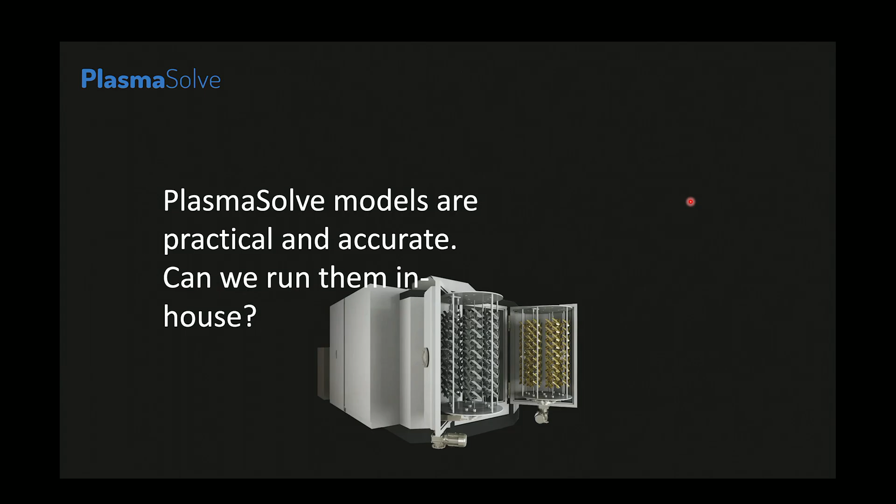But they also ask the question whether it is possible to have these solutions in-house for further prototyping, because we are sensitive to the fact that sometimes you simply cannot send equipment or process details to a contractor, be it for convenience reasons, contractual reasons, or legal reasons. And so today, I called this meeting together, and I'm so happy that so many of you were able to join, because from this day onward, the answer to this question from our end is a clear and decisive yes.

We have been running simulations internally. We have been doing modeling internally for the past 8 years. And in those 8 years, we have been continuously improving our software. We made various iterations on it. And over those 8 years, we were never happy enough with it to make a standalone product out of it.

But this year is the year where we say, okay, the PlasmaSolve software is mature enough, documented enough, and stable enough so that it can be released as a standalone product to the whole world, to all the plasma engineers and plasma coating engineers out there.

The name of the software is MatSight. That is the brand name we adopted. And we like to think of that as the next evolutionary leap in Industry 4.0, and more specifically in plasma process simulation and plasma equipment simulation.

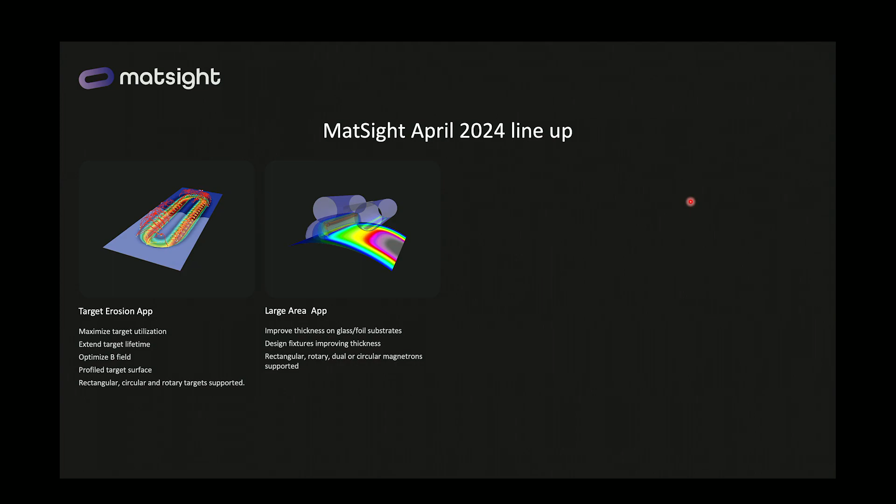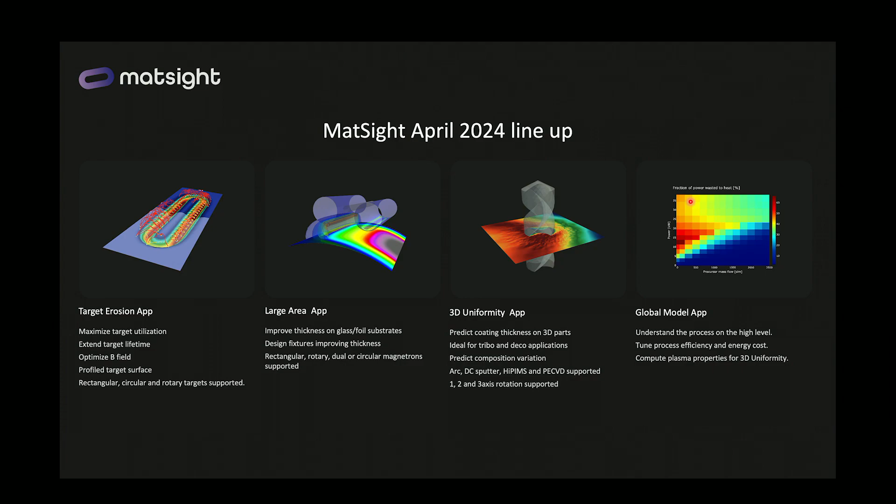We have the large area app, which is specifically tailored to the needs of operators and developers of inline coaters and roll-to-roll coaters. We have the 3D uniformity app that allows you to simulate coatings on real 3-dimensional substrates, most probably for tribological or decorative applications. And we have the global model app, which is sort of a multi-parameter, multi-domain simulation tool. This is what we are releasing today, and this is what is becoming available today.

But the list is by far not final. We picked these 4 apps because we've been doing consultancy for several years. And based on our experience with these 4 apps, either individually or in combination, we are able to address and to solve over 80% of all the consultancy projects we engage in. That is why we decided to release these 4 applications precisely.

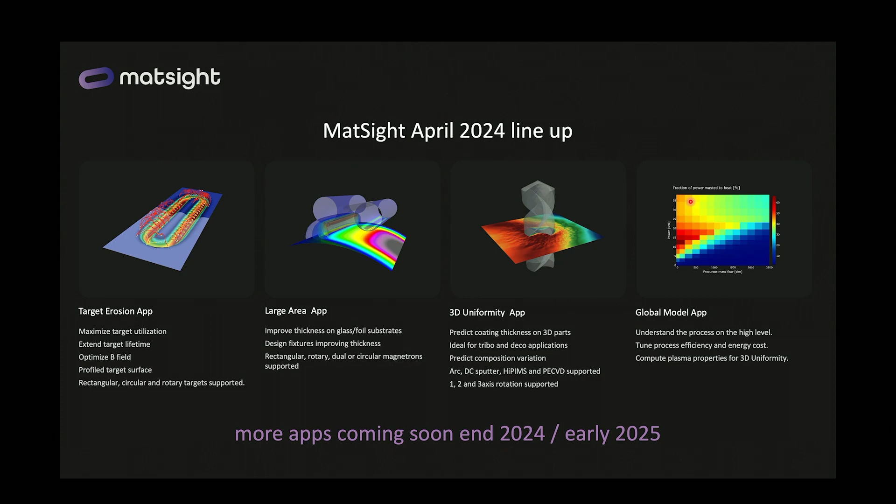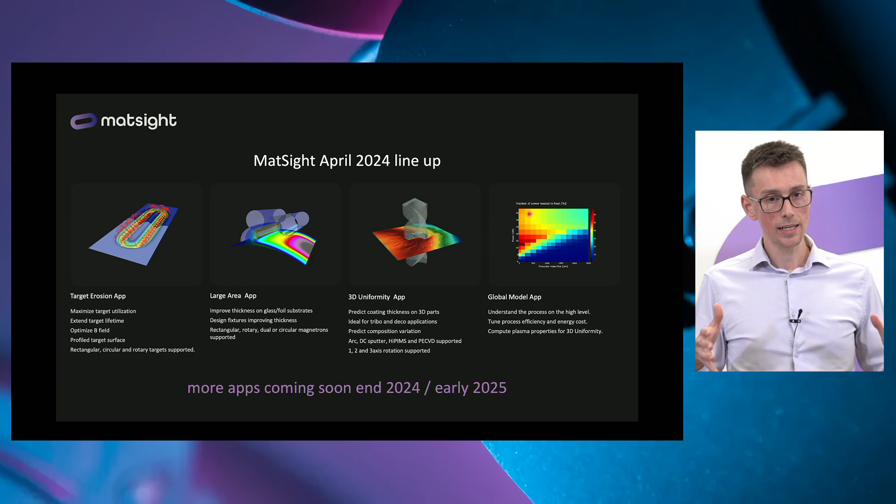The other modules that are coming later this year or maybe at the beginning of next year may not even be simulations. So for example, we even have a big data processing module in the works that allows you to analyze your machine logs at a glance. And we will be, of course, releasing them to you as we go. So I will get into more detail about these applications in a minute. But before I do, let me just dedicate 2 slides to the philosophy of the software.

I boldly claimed that we see MatSight as the next evolutionary leap in plasma process and plasma equipment simulation. So I think I should specify that a little further, because there have been legacy solutions for plasma simulation and plasma coating simulation. And I just want to mention where we differentiate as opposed to where we are consistent. I think the main point where we are consistent with all the simulation and modeling know-how of the past decade or 2 is the physics. We are not reporting here or publishing here any revolutionary approach to treating physics.

We are very much aware of the amazing work that the giants of our industry did on the topic of coating process modeling and coating process simulation. And we try to stand on the shoulders of those giants and look at the different physical mechanisms and chemical mechanisms that they studied, identify those mechanisms which are the most important for a given challenge, for a given application, and distill the best out of this work and make sure that it gets into the MatSight software.

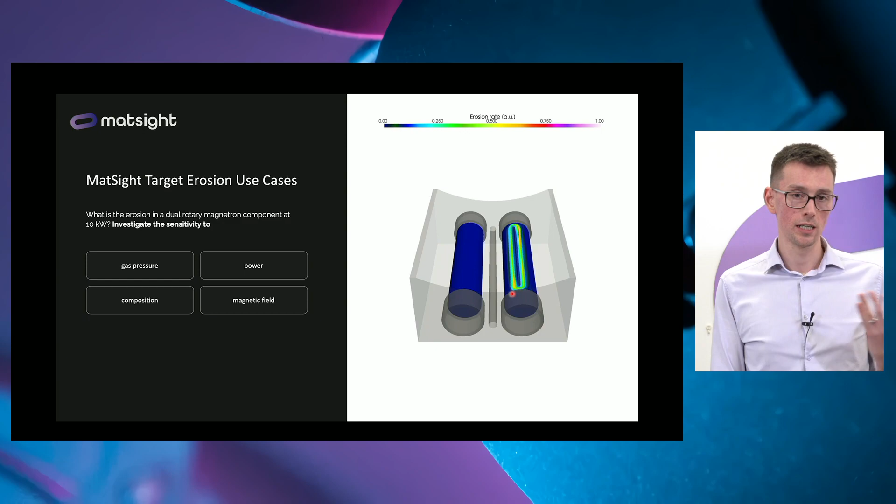The typical output that you get from the target erosion application, the primary output that you get, is of course the number, the target utilization, but what goes hand in hand with it is the spatially resolved erosion rate. Here we see a time snapshot of the erosion rate in an MF dual sputtering system. So as you're probably guessing, the cathode on the right is the cathode, whereas the other electrode is in this snapshot the anode. And we can look at it from various angles, and you see that there are clear over-erosion patterns in the corners of the racetrack.

You can also sweep through the simulation, visualizing the plasma density and identifying potential hotspots and electron hotspots on the anode or on the opposing cathode, which I dare say is pretty interesting. But what is even more interesting and even more practical is doing parametric studies with it, right? Because describing the current system, that's great, but the question driving us is always, how do I improve it?

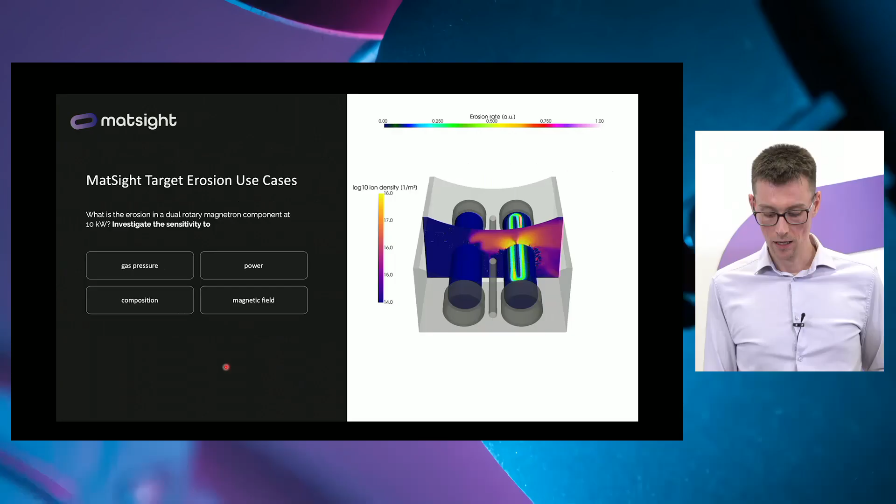You can test with the erosion app the sensitivity of the erosion to the gas pressure, power, target composition or gas composition, or the magnetic field. On purpose, I will show you the pressure first. I will sweep through 0.3, 0.45, and 0.6 pascals, and when I initially do that, you'll probably see nothing. If I zoom in on that, and if you look really close, you will see that there is a very subtle difference in how the erosion rate in this over-erosion spot changed.

Visually, this might not seem as much, but if you had MatSight here and if you clicked into the over-erosion spot, you would actually see that there is a tiny change of 4% in the over-erosion groove, which may seem insignificant, but actually the 4% change in the depth of the over-erosion pattern translates to a 4% reduction of the lifetime of the rotary target. So this may actually not be as little change as it seems.

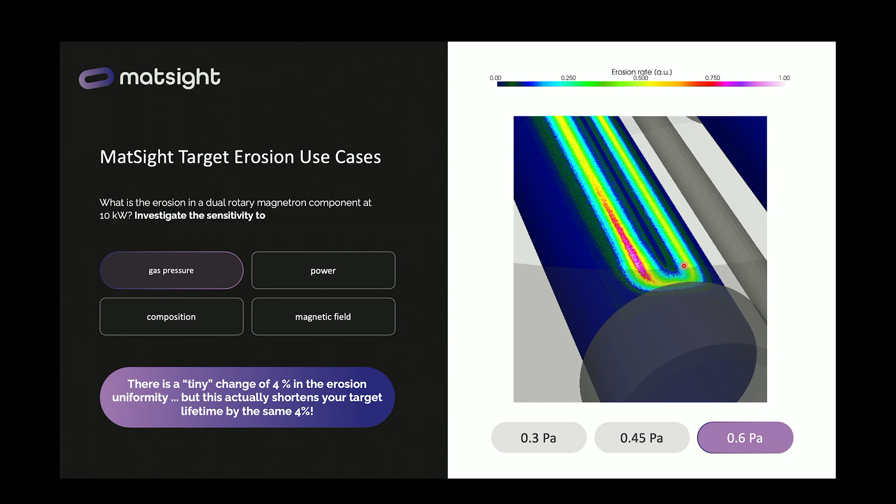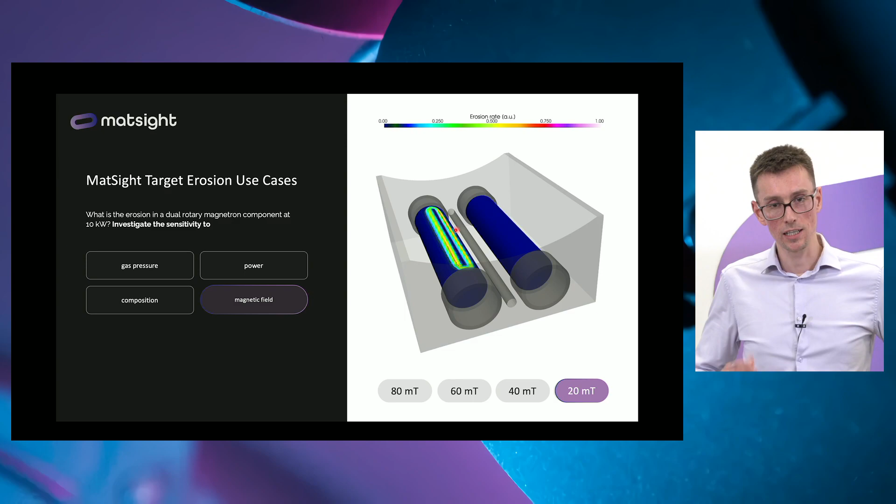There is still an over-erosion on this side, but it is almost perfectly compensated by the over-erosion in the other wing of the racetrack. So in this case, you can assume quite a uniform, quite an optimized erosion of the rotary target. But of course, you might say, well, this would suggest that if you go to zero magnetic field, then you have a perfect erosion. This is, of course, not true. So let's see how that behaves in more detail.

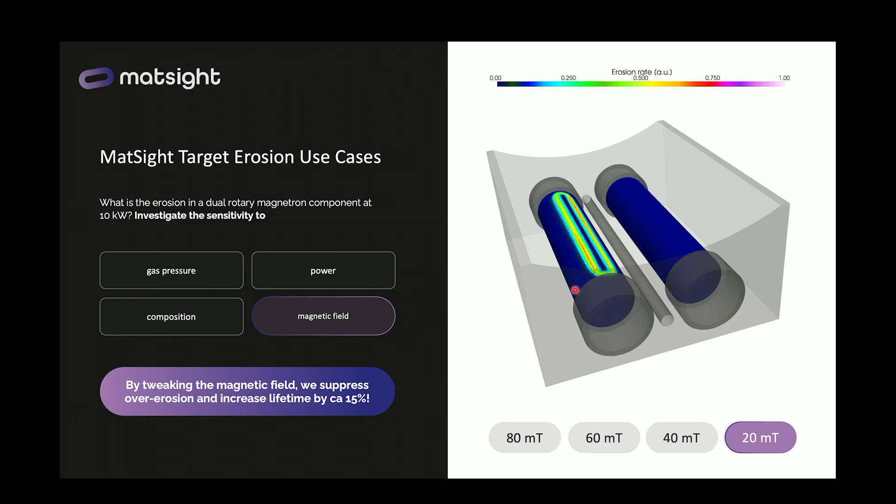Oh, and before we do, I should also mention that just by doing this simple trick of reducing the magnetic field, we were able to suppress the over-erosion and increase the target lifetime by approximately 15%.

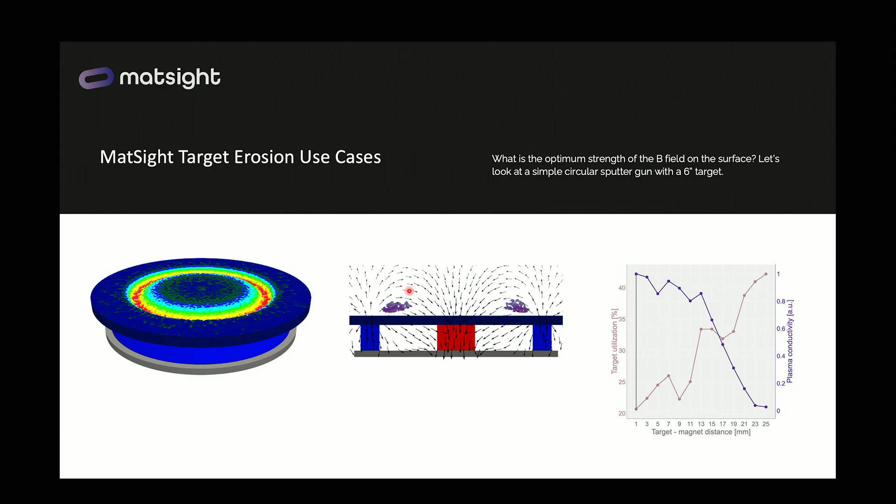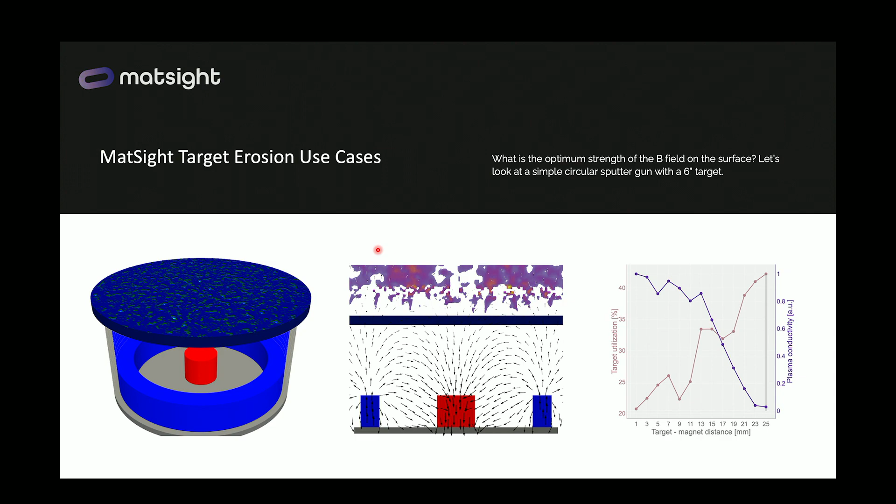So if I cycle through that again, you can very easily visualize how the plasma and erosion respond to the strength of the magnetic field and make the decision what is the ideal distance of the target surface and the magnetic assembly. In this specific case, we went from 20% target utilization to 35%. So by finding the right magnet position, the target utilization in this specific scenario nearly doubled.

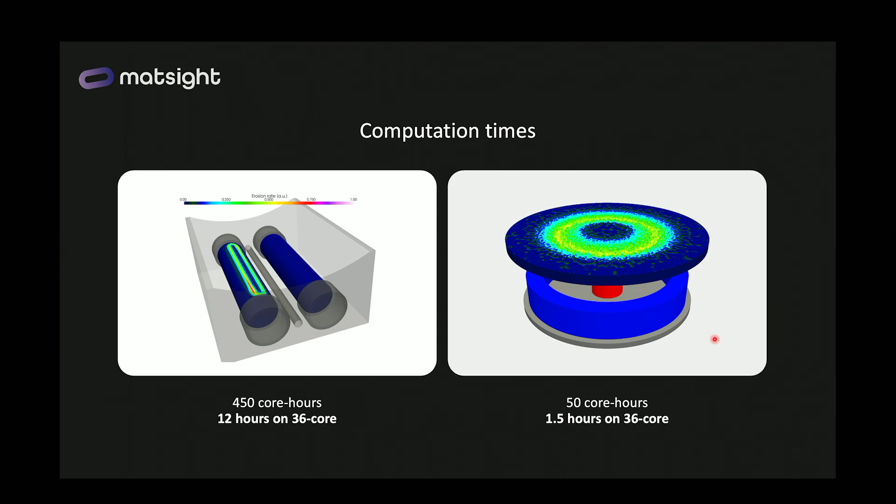And before we move on to the next step, I want to comment on the computation times. The large 1 meter or half a meter industrial setup takes 12 hours to compute on a 36-core machine. If you want to extrapolate to 4-meter cathodes, you can essentially apply a linear extrapolation. So in this case, the whole geometry was about 1 meter long. So for a 4-meter cathode, you could expect something like 48 to 60 hours.

This is certainly faster than building the cathode prototype. It's probably even faster than doing experiments with existing cathode prototypes and comparing them. On the smaller setup with a 6-inch planar target, you can get the result in as little as 1.5 hours. So this is a very fast computation time, I would say.

Okay, so this was about the target erosion app, but of course eroding the target and designing a proper cathode is important, but ultimately the product we are after is the coating. And we want to understand how the coating affects what grows on the substrate. For those of you who are doing that in inline coaters, roll-to-roll coaters, generally in large area applications, we have devised the MatSight Large Area app.

And the MatSight Large Area app does effectively simulate how a given racetrack, how a given cathode imprint propagates onto the substrate and how it affects the film thickness, the film composition, and indirectly the film properties. You can use it to design fixtures that improve your coating thickness distribution. You can also use it in drum coaters or batch coaters to reduce the top, middle, bottom thickness variation.

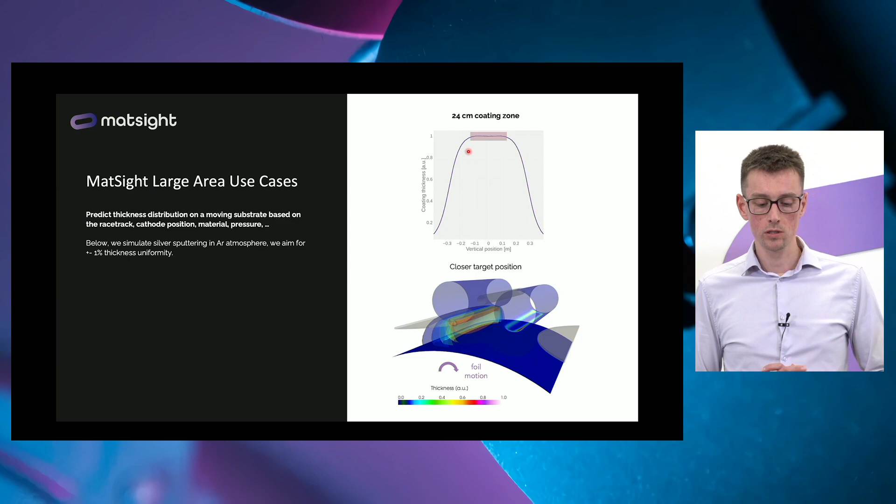So the next logical step is moving the fixture a bit further away from the cathodes, and this actually turns out to be the sweet spot for us here, because with this specific fixture position that has to be within plus minus 2 centimeters, let's say, the width of the coating zone has increased from the original 16 centimeters to about 24 centimeters, which is a significant increase.

Now imagine testing this experimentally, right? If you wanted to compare different fixture geometries, how many days it would take, how many weeks it would take to do that. If you have the simulation app that will guide you through the process, it will be much less painful, much less demanding to incorporate, for example, a cathode with a new metal, because this deposition imprint is going to be metal-specific and gas-specific. So I think the time savings on this specifically are tremendous.

You can also get a similar effect by moving the cathodes closer to the substrate. You see that in this case, the width of the coating zone is even larger. It is 30 centimeters, and if we were a bit more permissive about the thickness variation, it would probably be even more. But of course, whether it is a good idea to move the cathodes closer to the substrate or not, that depends on the coating that you're trying to grow.

And to understand whether this is going to impact your coating properties or your coating quality, you can always combine the large area deposition app with the target erosion app or with the global plasma model and see whether the ion bombardment and other plasma properties which are affecting the coating are changing in any significant way.

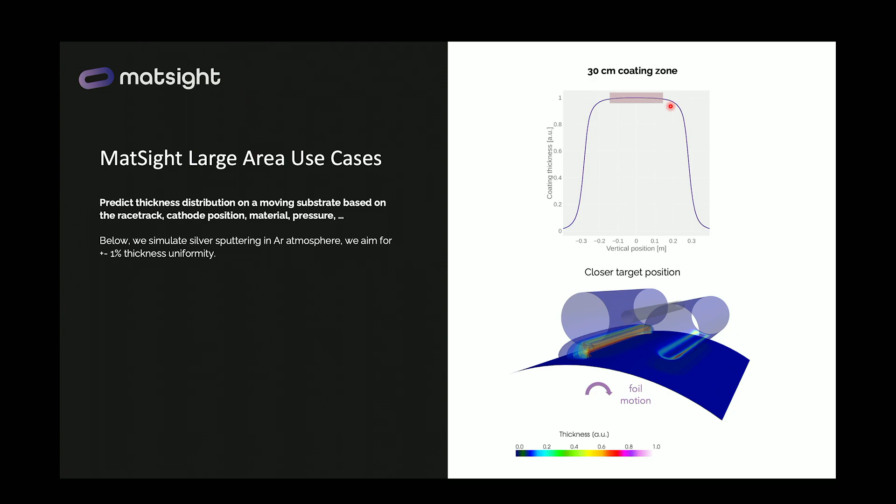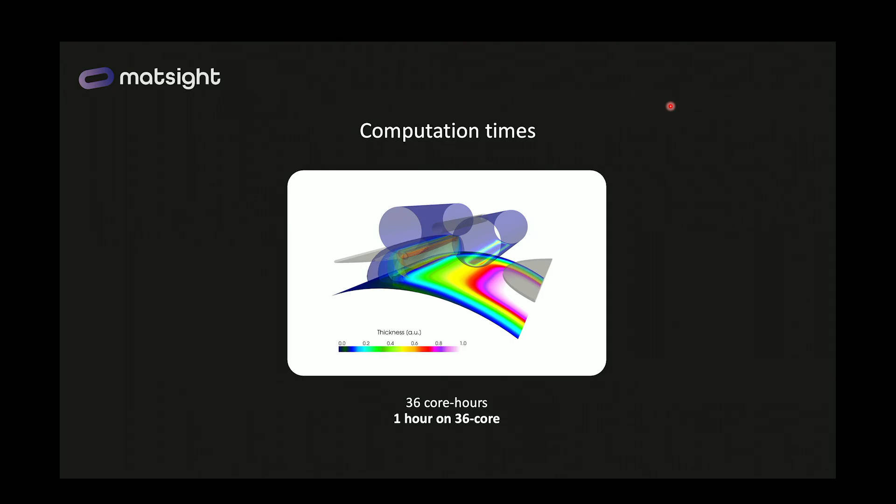The computation times on this app are, I would say, better than fast enough. So for this large area coater, it took 1 hour to perform this simulation. So if you went to a 4-meter coater, again, a linear scaling would apply, and you would get your result in about 4 hours.

But what if your substrate is not planar? What if it is more elaborate, like a drill bit, a milling tool, or whatever else you might be coating? For those of you, we devised the MatSight 3D Uniformity app, which allows you to visualize variations of thickness, variations of coating atomic composition, and to an extent a variation of coating properties on realistic three-dimensional parts.

If you're running batch coaters, if you're a coating center or a job coater, this can save you dozens to hundreds of trial processes per year. Our calculation and our customers' calculation is that if the app saves you 20 to 25 trial and error processes, it will have already paid for itself.

The application is a hybrid algorithm based on tracing neutral particles and charged particles. And thanks to that, it is supporting DC sputtering, MF sputtering, HiPIMS, arc PVD alike, and you can even use it for PECVD and ion etching.

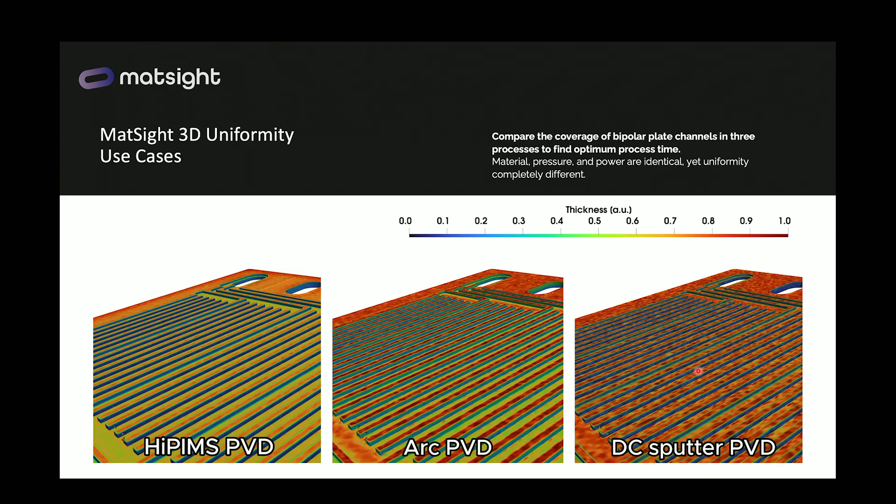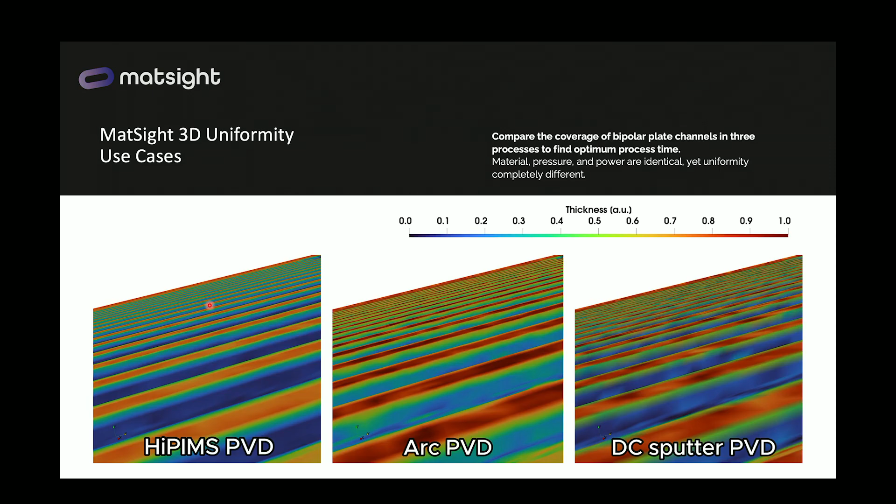So if we take a closer look, you'll see that the bipolar plate coated by sputtering PVD is actually suffering from highly undercoated walls of the channels, which are coated in a much better way in arc PVD, and HiPIMS is somewhere between DC sputtering and arc PVD, as you would expect.

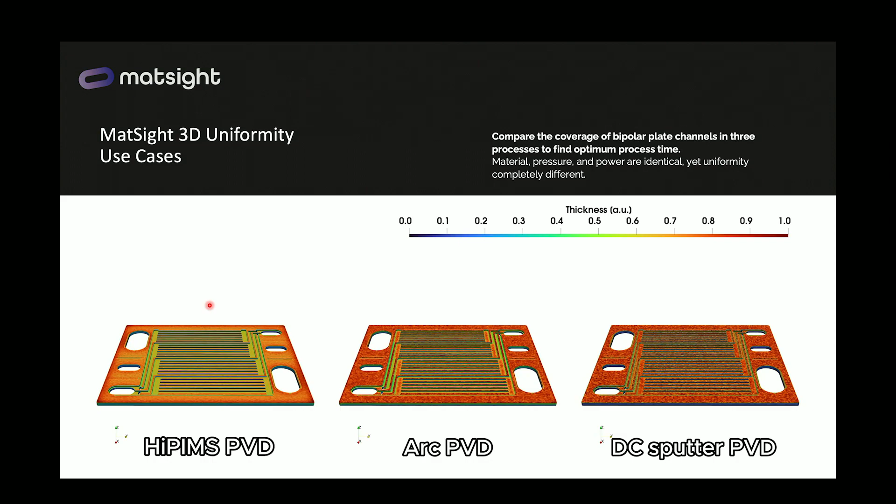And of course, here we're comparing three extreme cases: DC sputtering, arc PVD, and HiPIMS. You could also use the app to visualize what would happen if you change the bias voltage in either of these processes, if you change the gas pressure, if you change the power of your cathode, and how that impacts the coating distribution on your component.

You could also see how different elements are deposited, because lighter elements are going to have an easier way of penetrating these narrow trenches and narrow channels.

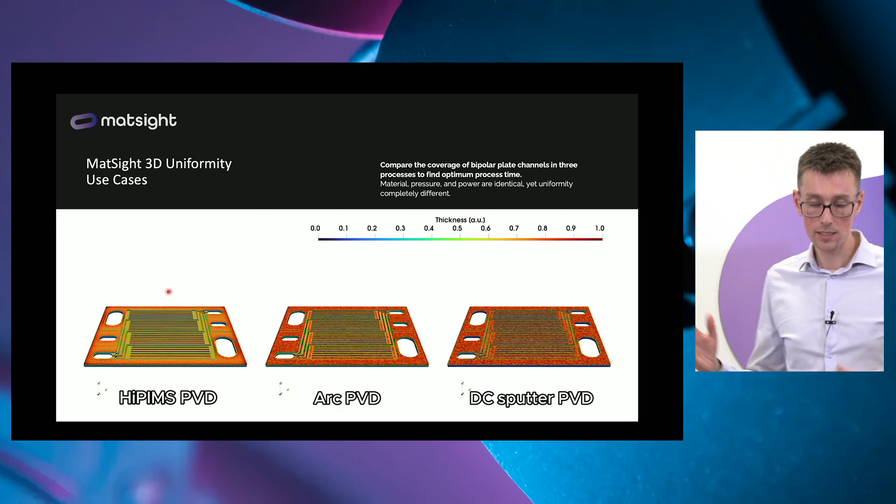But many of you are coating 3D assemblies and loading them like these bevel gears, right? And if I showed you a static simulation, just like in the previous case with the bipolar plate, then for a realistically loaded coater, this is probably what you'd get: coating coming from one side where the cathodes are, and the other part uncoated.

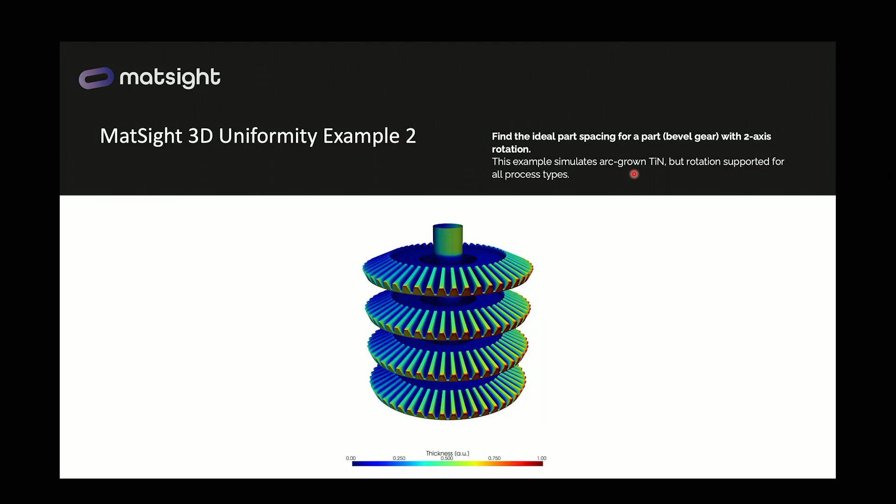So the question is, does MatSight support the rotation of these parts? And I'm saying that because, of course, it can. The flexibility of the software allows you to revolve the part in the simulation and integrate so that you obtain a full 360-degree deposition in these bevel gears undergoing two-axis rotation.

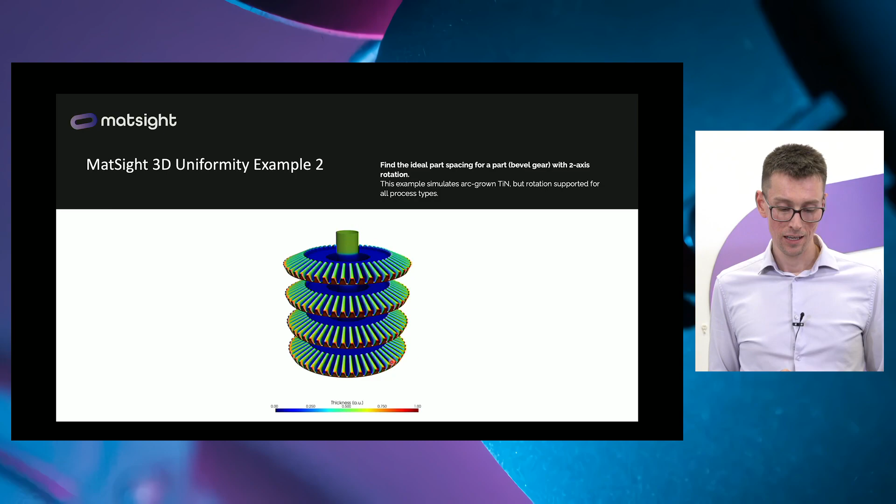And that opens up possibilities for a range of interesting studies. In this one, in all cases, it is arc PVD. We varied the distance between the bevel gears, and you can clearly see that there is such a thing as an ideal distance between your components.

If the bevel gears are too close to each other, you get over-deposition on the outer tooth of the gear and under-deposition on the inner side. Same for the second-lowest distance. At this distance, which was about 35 millimeters, you already get quite a nice and even deposition on the teeth, which gets even better if you increase the distance further.

And then, depending on your thickness goal, you can use MatSight and the 3D Uniformity app to design the optimum loading of your coater and of the components that you're coating.

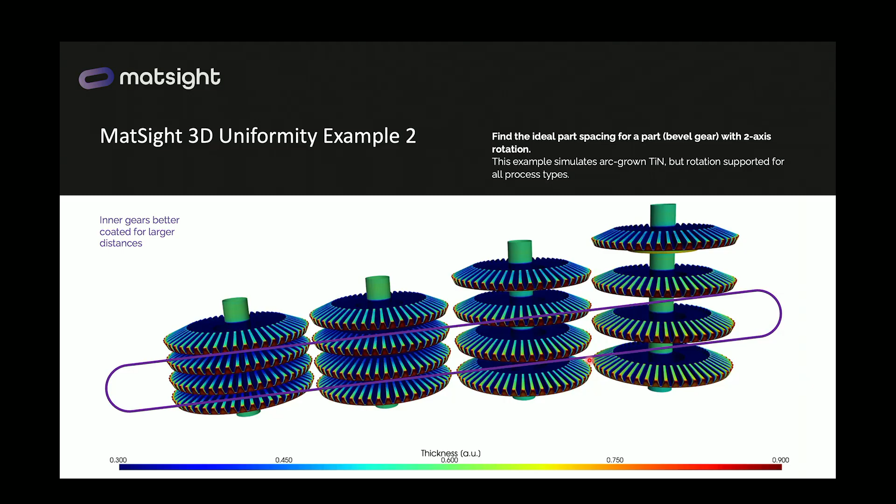But I looked at the list of people who registered, and there were at least 20 people doing tribological and decorative coatings. In those coaters, you're usually running 3-axis rotation. And I bet you're wondering whether MatSight can do that as well. Well, I'm happy to say that it can.

And if you are coating from multiple elements, which most of you are going to be doing, you can also visualize how different elements get deposited on different parts of your 3D tool that you are coating.

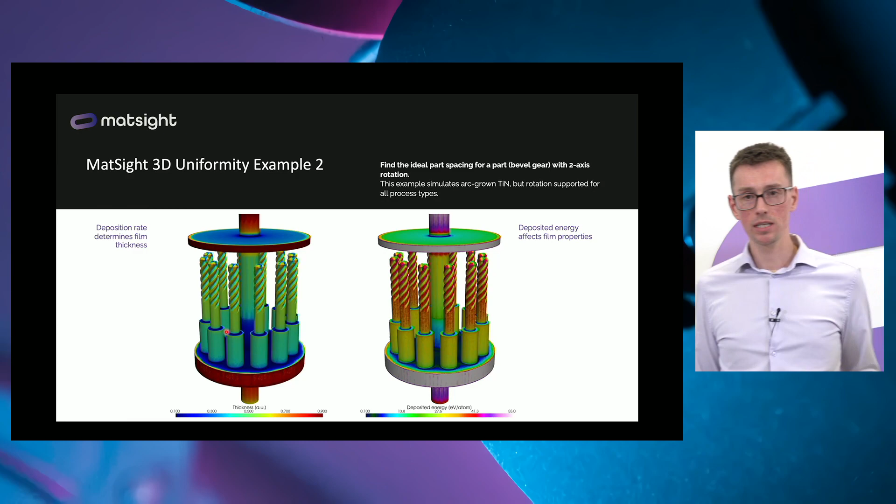So this is indeed a very flexible tool, and with acceptable computational costs, it really allows you to simulate fully loaded substrate holders and carousels and find optimum distance between parts and fixtures, and really avoid a huge volume of trial and error that you often need to do when you need to transfer your process to a new part geometry or to a new part size.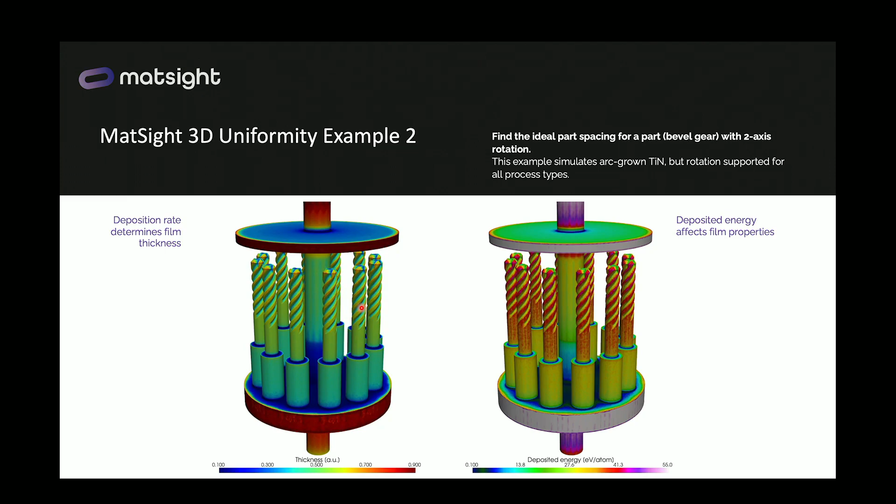The computation times on the Uniformity app are, I dare say, acceptable. It is in the order of hours on a 36-core machine. For the fully loaded rotating carousel box, it is about 10 hours, including all the rotations.

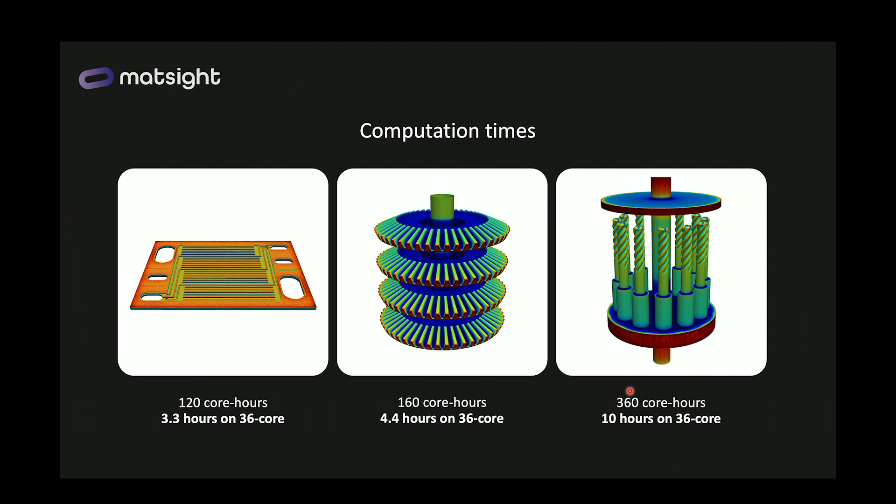Now, I have to admit one thing: we don't run those simulations that take 10 hours. I mean, we do sometimes, but it is not always the most logical thing to do. For example, if you want to optimize just the top fixture position, you don't need all the detail in your simulation to find the right position of the top plate.

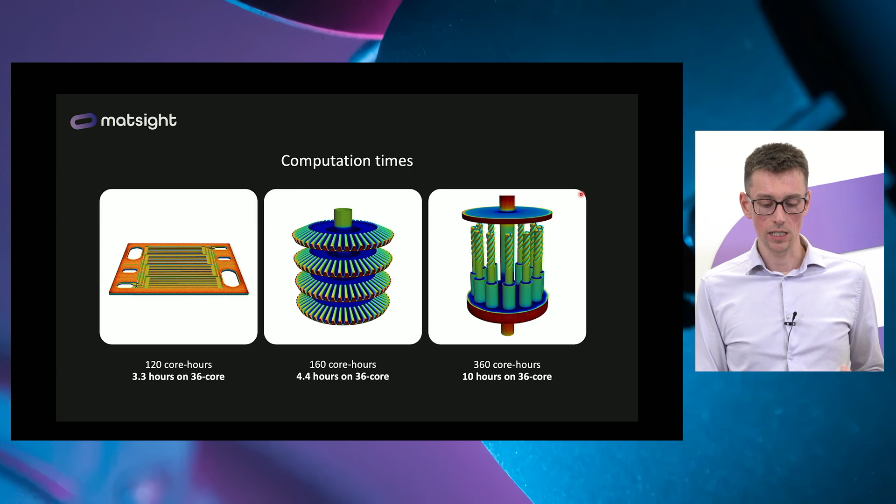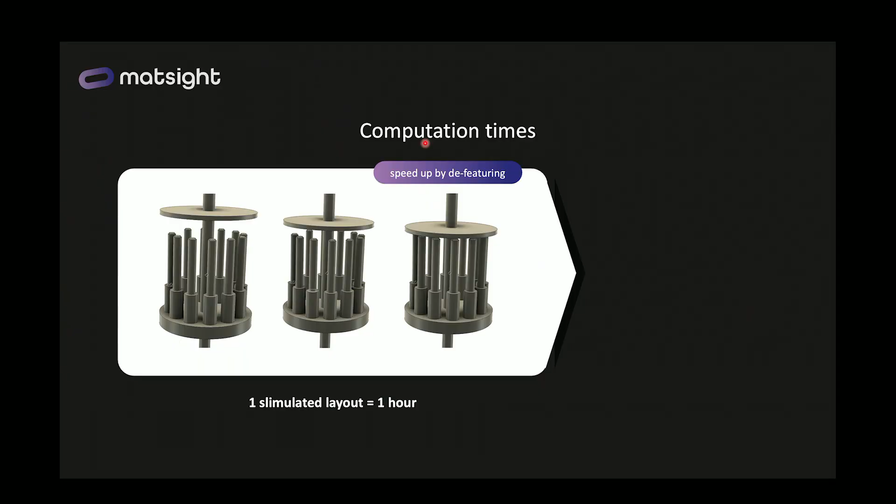So if we get the task of finding the right plate position for a specific process point and for a specific part geometry, we very often defeature the geometry, smooth out the grooves and cutting edges of the milling tools, and run these simplified simulations where we just find the optimum fixture position.

And when we have found the optimum fixture position, we probably run one super detailed simulation with a 2-axis rotation just to confirm that we did everything right. But in these simplified layouts, even 2-axis rotation can be completed in as little as 1 hour of simulation time.

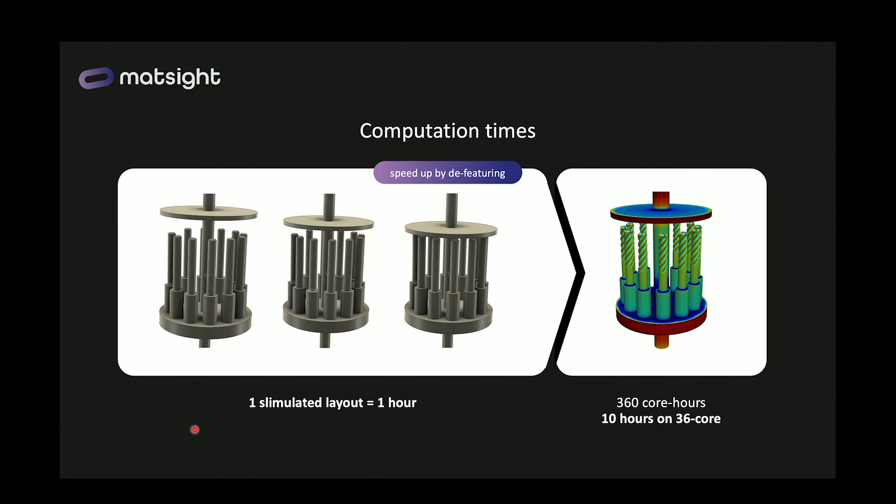And the last app that I want to talk about is the MatSight global model. In terms of visuals and visualizations, this is a bit of a difficult one because it does not have any fancy 3-dimensional output.

The global model is a simulation tool for multi-domain dynamic systems where plasma is the key component. It is a 0D model, but it allows you to perform fast and high-level investigations that take into account the plasma process as such, as well as its peripheries: the cooling system, the heating system, the power supply with its internal characteristics, you name it.

What we typically use it for is predicting, for example, metal ionization degree in PVD processes and ion implantation rate in PVD processes. We also use it for transferring proof-of-concept processes from small-scale laboratory coaters to large-scale industrial coaters. We also use it for PECVD quite a lot, whereby we can assess the energy efficiency of a PECVD process and precursor utilization.

Like I suggested, the global model is based not on 3D simulations, but on ordinary differential equations. So the geometrical factors and the size of your device can either be obtained from other MatSight applications or you simply estimate it based on your experience.

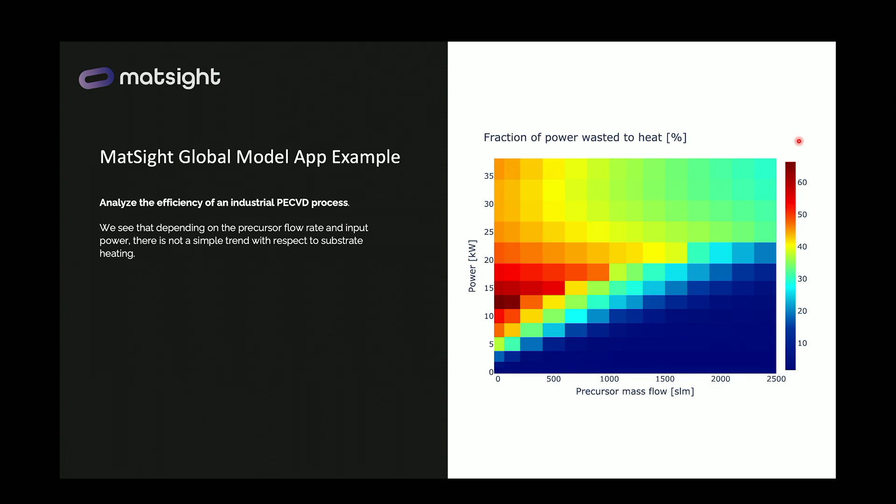The global model allows you to perform precisely these types of high-level analyses. It also allows you to quantify the energy cost of your process. For many processes, the energy cost chart looks something like this: there is a certain minimum following a diagonal between flow rate and power, and the moment you deviate from this minimum, your energy cost starts to explode, becoming 3, 4, even 5 times higher than it would be at the optimum working point. So this is what the GPM is for: high-level multi-domain analysis of plasma processes.

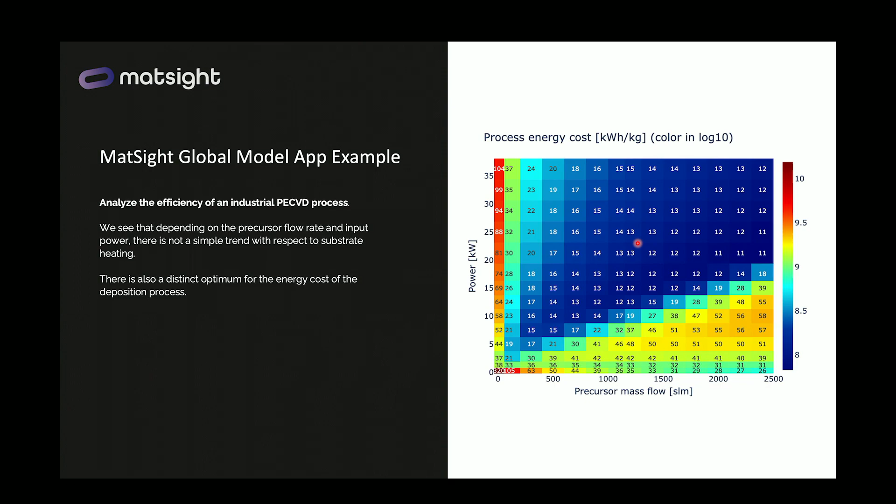Okay, so these are the 4 apps that we are releasing today.

Now I want to dig into the technical specifics a little bit. I think if I got your attention at least a little bit, you're probably wondering about the user interface. The choice we made, which I will demonstrate on the 3D target erosion app, is Python. Python is the heart of MatSight, and it is also what drives the user interface. A configuration file for a MatSight simulation is a Python script where you define your components and your process in Python syntax. If this seems scary, I fully appreciate that, but I'll explain how it's actually easier and better for everyone. Because what I haven't said is that, yes, it is Python, but it does not mean it is a command line text-based application. We're not in the 90s anymore.

Yes, the configuration file is a Python script, but you can run it either in the fully automated mode, where you just see logs and textual output, or in the interactive mode, where the application interface pops up and talks to you at the points where you need it most. So let's see how that works on the example of the target erosion app.

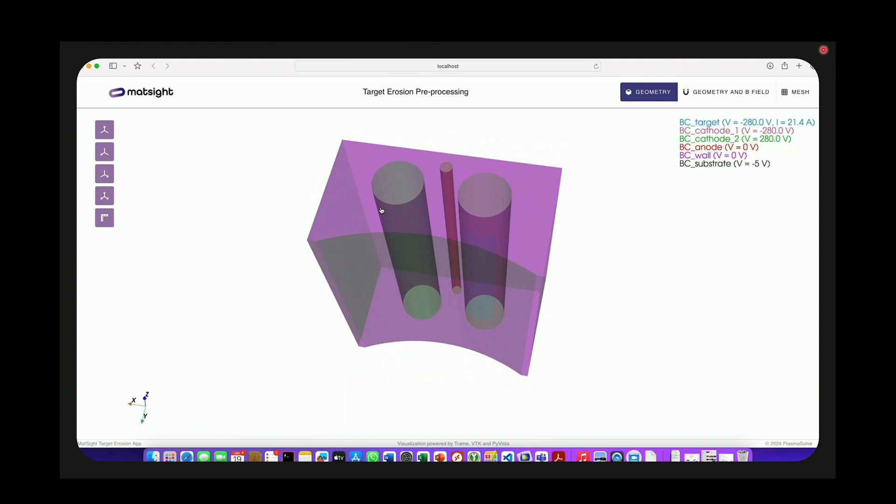When I do that, the simulation configuration is loaded from the configuration script, and I receive in a web browser window, running on your computer, a visualization interface that allows you to check that all the components from your CAD files have been loaded correctly, are in the right place, have the right dimensions, and that the boundary conditions have been assigned accordingly.

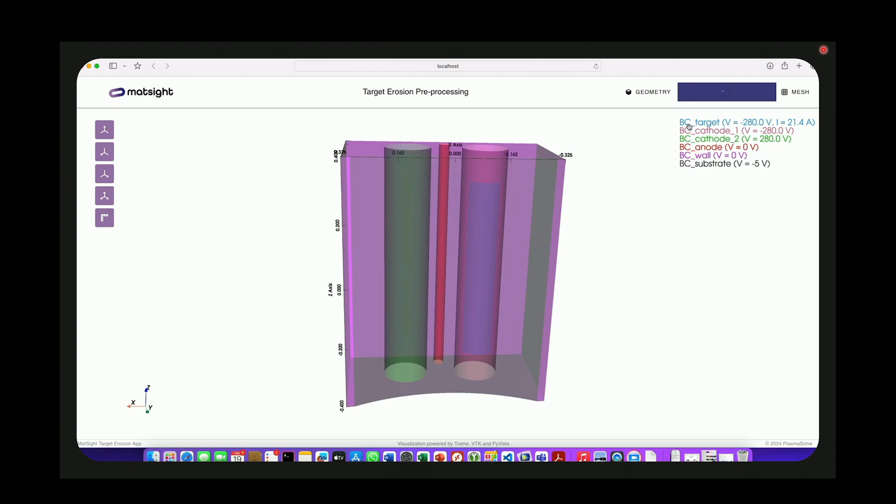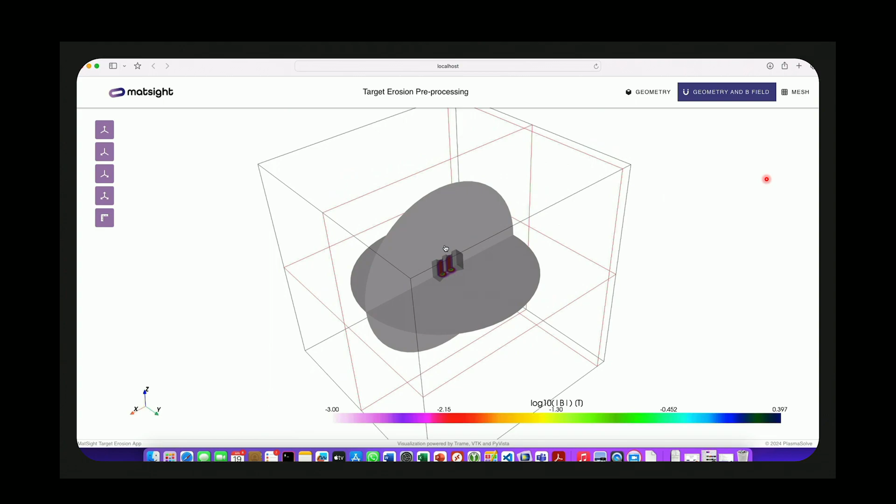We're looking at the example of the target erosion app. We see two cathodes there with an anode in the middle, but it is very important to make sure that your magnetic field aligns with the geometry well, for which you have the Geometry and B Field tab. This shows you the magnetic field in your computational geometry. You have access to various slices, so you can see what it looks like in space. Most importantly, you can check the alignment of the magnetic field with your cathodes and make sure nothing went wrong in the process, and that your magnets are indeed placed in the cathode.

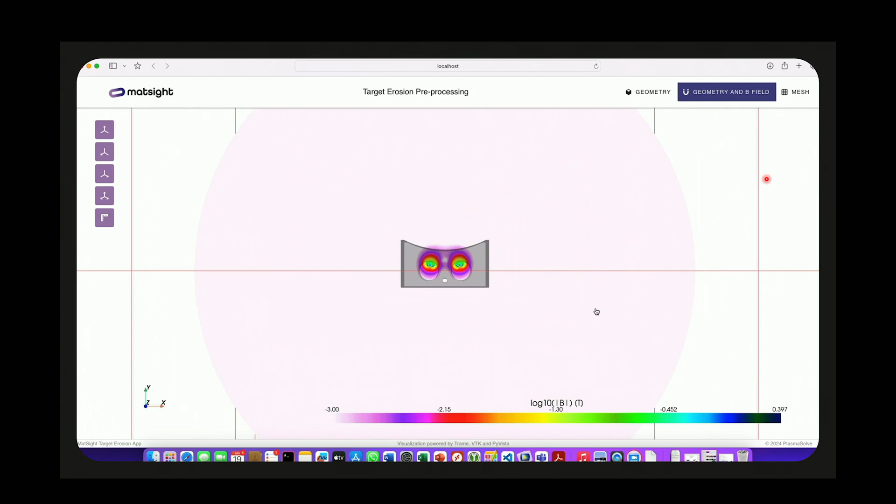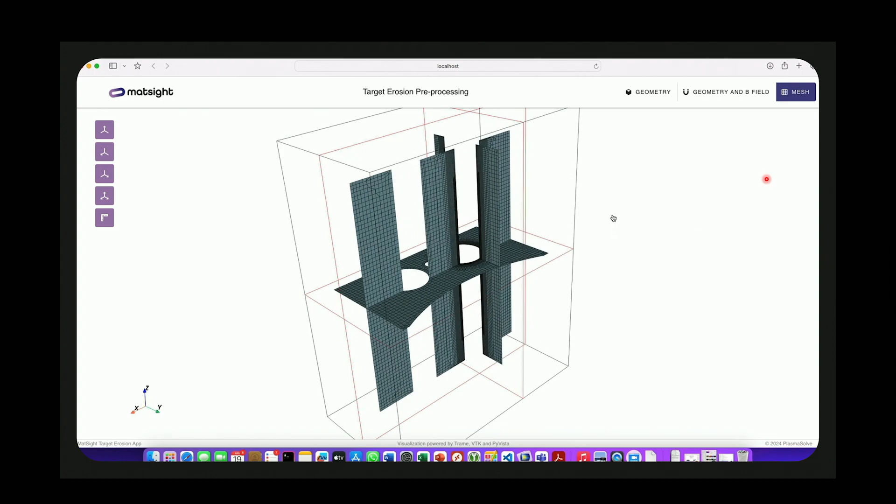So before you commit, before you run the 12-hour simulation, you have an interface which assures you that everything is set up correctly. If you are a more proficient user, you can also have a look at the computational mesh, which is the discrete approximation of your simulation geometry. And you can make sure that all the key features, all the key components are resolved in sufficient detail. And if you suspect that they are not, you can always go back to the drawing board and refine the mesh size.

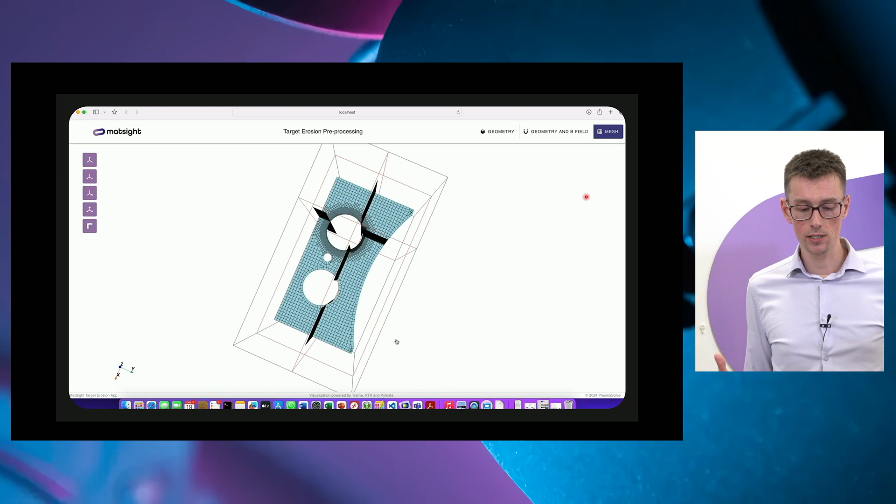Now, if you are happy with the pre-processing, if you're happy with what the simulation setup looks like, you can simply close the pre-processing window and we will see what happens. So if you go and close the pre-processing window, you see that you get a prompt from the simulation asking you whether the mesh and geometry were okay and whether you want to continue with the simulation. You could press no, and then your pipeline terminates. You go back to your Python configuration file, you make the fixes, and you rerun everything again.

But I was actually quite happy with what I saw, so I'm going to click yes, and this is the place where the simulation would run. Of course, it would run for some 12 hours, so we just have a placeholder. And if the actual simulation was running, you would be getting useful analytics and monitoring data.

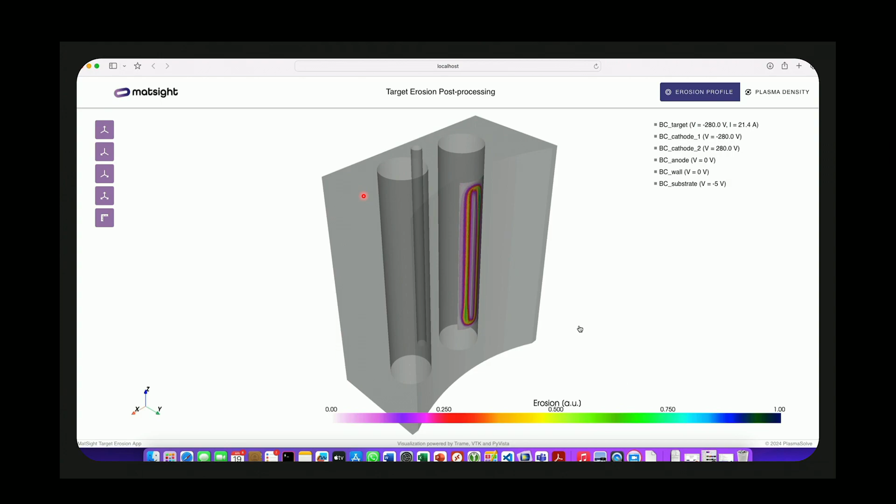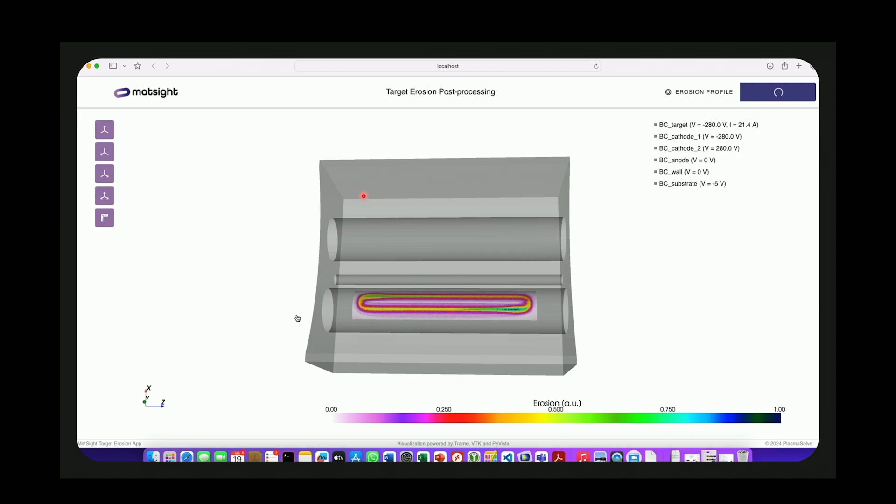After the simulation completes, you get access to the primary observable of this specific simulation app, which is the target erosion. So you can find the right angle to look at it, you can quantify the over-erosion, and you can also look at the plasma distribution in this system, which is accessible to you through a series of three-dimensional slices. So here you see the typical plasma lobes in front of the cathode, and you see how the plasma is grounding itself to the opposing electrode, which is in this part of the period acting as the anode.

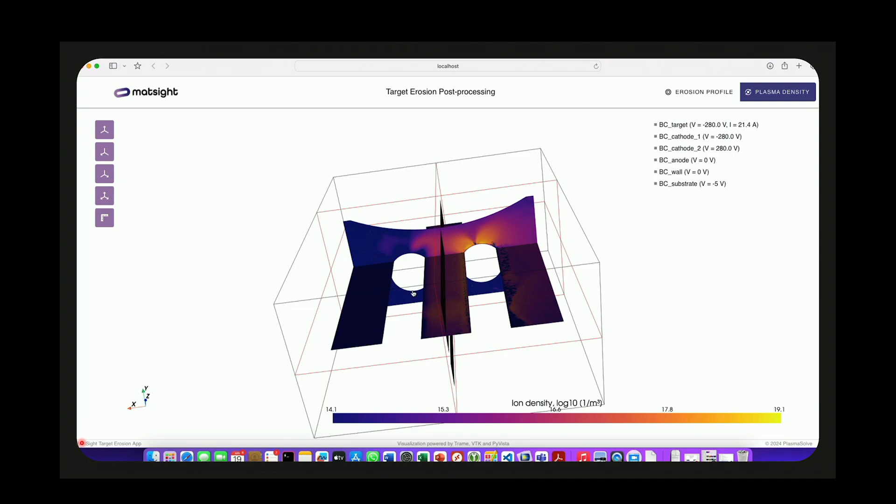You can move around these slices, identifying whether there are anode hotspots or other electron hotspots in your system. And you can also look at the plasma, how is that distributed in the region between your cathode and your substrate, and make deductions, make extrapolations into what the ion bombardment on your substrate is going to look like.

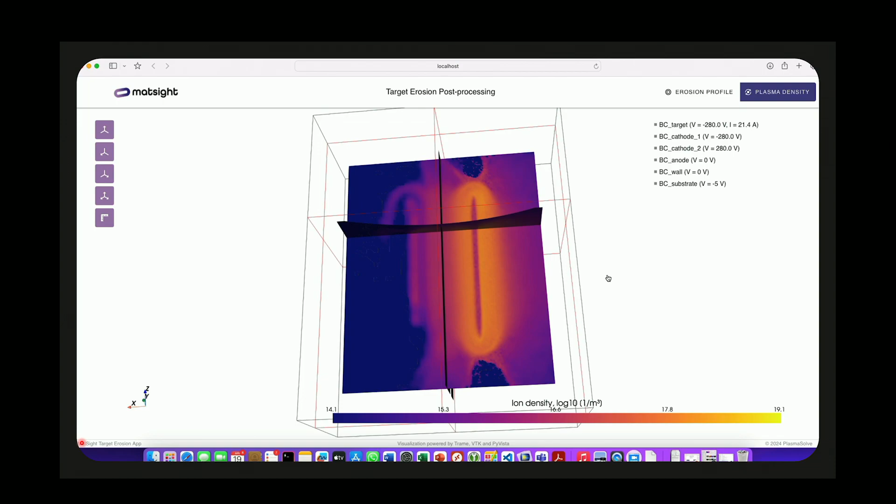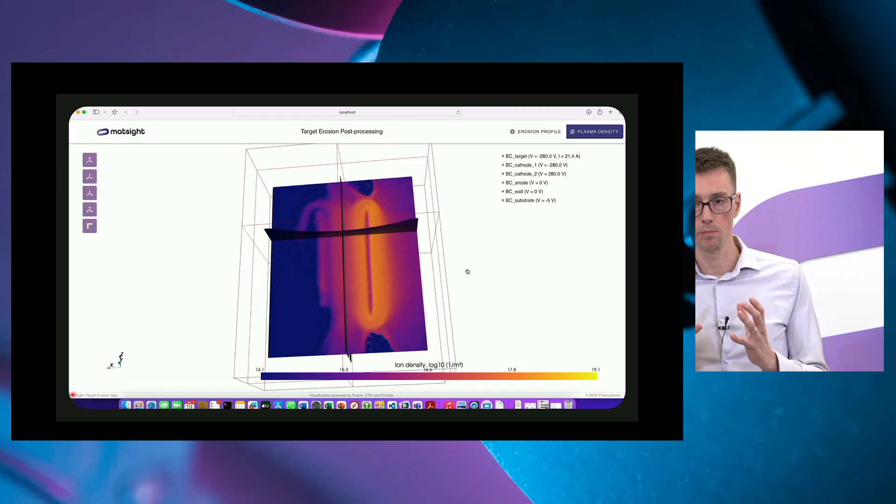So this is how MatSight talks to you. It is a Python-based package. The simulation configuration file is a Python script, but when you run it, you actually get all of this interactivity. So we're trying to combine the best of both worlds, right? If you want to run a series of single simulations, you probably don't mind having to configure them through a Python script. And if you want to run a parametric study or an optimization study, you are going to be so happy about the fact that this is in Python, because you can change fixture positions using for loops. You can connect it to optimization algorithms and find optimum configurations in extremely short amounts of time.

And we're not entirely closed to the idea that at some point we will make a graphical user interface also for the simulation setup, but we want to hear your feedback first. If you, as the stakeholders and customers, tell us that you absolutely need the graphical interface for the simulation setup, we'll add one. That's what will happen. But in the first iteration, we have the Python interface, and we want to hear how you like it. Because we think that wherever you need the interactivity, we have the interactivity that you need.

So I'm almost getting to the end here. One last property I want to mention are horizontal and vertical integrations. This is also something which is enabled to a great extent by using Python and modern technologies. In terms of horizontal integration, we've actually seen one example of that today, and that was running a target erosion simulation and using its output as an input to the large-scale deposition app and predicting the coating thickness in the large-scale app.

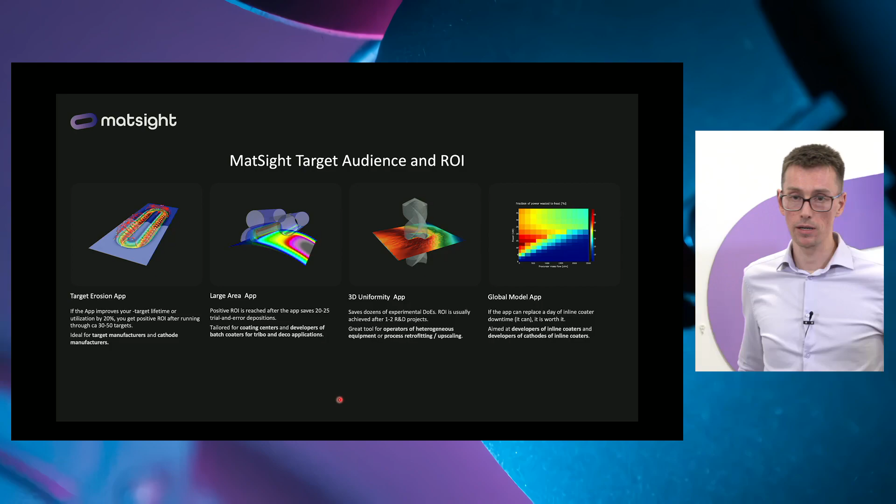So this brings me almost to the end. To summarize, we introduced 4 initial MatSight applications today, with more coming later this year and early next year. We have the target erosion app, aimed at target manufacturers and cathode component manufacturers primarily. We have the Large Area app, aimed at people working with inline coaters.

We have the 3D Uniformity app, aimed at engineers working on tribo and deco coatings with substrates that have complex geometries. And we are giving you the Global Model app, which is a more high-level, multi-domain analytics tool, helping you understand how the plasma subsystem interacts with other subsystems in your coating equipment.

If you like this, and I hope many of you did, you're probably wondering what next. And depending on your expectations, depending on your experience, there are two ways this could play out. As you can hopefully understand, our resources are limited. So we are ready to give out trials, but we will be giving out a limited amount of trials, especially to companies that qualify. So if you would like to try MatSight in-house, do give us a call, do write us an email describing what your expectations are.

And if you're a coating center, a company developing cathodes or large area coaters that can dedicate at least half an FTE to learning with MatSight over the course of the next 4 or 5 weeks until they are proficient with it, then you probably qualify for a free trial. If you would like to see how MatSight performs in your specific use case without having to dedicate a person from your team to work with it, then we recommend to engage in a qualification project.